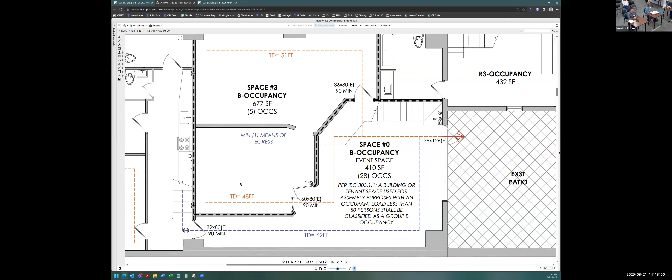This space on the second floor, the assembly space we're talking about, will have 90 people maximum. Part of the reason we're hoping to avoid having to sprinkler the studio is that it's sound separate, with isolated rooms and double walls, acoustically built so there aren't any perforations between the walls. It would be a real bummer to have to perforate the walls with sprinkler heads.

Is the R3 occupancy confusing on this plan? Is the bottom right corner an open double-story space, or is there a floor? Yes, that's where the double story space is. And the room that doesn't look like it has a door, is that the assembly space? No, that's the upper part of the recording studio. So that's also a double height space?

So the assembly space we're talking about is now to the left, space 4. Yes, that space. That's the second floor they're looking at.

Is the second floor R3 area we're seeing on our screen right now protected with a sprinkler system, since that was part of the expansion? No, that isn't currently sprinklered, but where it says R3 occupancy, where you enter into the house, the residence is all sprinklered. Yes, Matthew, that part was part of the expansion back in 2012 and 13, part of the NFPA 13R sprinkler system.

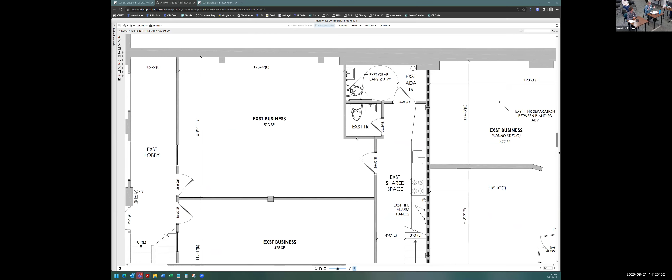If you're going to spend the money to bring in a 13 system and you're mixing and matching... Wayne, I can barely hear you. When you're going to spend the money to bring a 13 system into the building, that's your expense. Installing the sprinklers is relatively easier to do, but it's going to cost a lot of money to bring in a 13 system. But your concern is not the cost, it's the intrusion.

On your recording studio space. And it's soundproof? Yeah, agreed, yeah.

And as far as we can tell, the cost would be quite a bit higher because of... our goal would be to... Did you get any prices for that? Yeah, we've talked to some sprinkler guys. I mean, honestly...

If we could just sprinkler the second floor event space, and then sprinkler the spaces below, and those two egresses, the two stairways, that would keep it all on that side of the building, and it would be much more cost effective. The reason it would be more cost effective is because of the size of the line that has service.

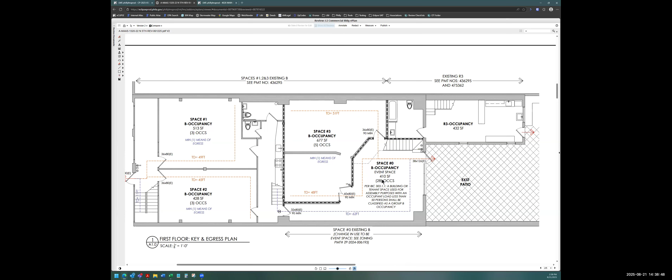I was just pointing out that the appellant's request to focus on sprinklering spaces 1 and 2, and the area above in space 4, would not address the concern I'm raising with occupants egressing through space 0. At the beginning of the discussion, I asked how occupants from the second floor egress. One egress is to the left, one is to the right. The one on the right has to traverse space 0. If that space isn't protected with sprinklers, occupants on the second floor would have to go down a story, enter a room, realize that room was actually where the fire started, and have to go backwards and back up a set of stairs. That's typically not the intent of the code. You want the entire path protected, just as the room they left was.

Could a solution be that if space 0, which you're referring to as where people are egressing, was sprinklered as well, would that address it?

So I think where we are then is the Randolph Street side plus through space 0, and not Ben's recording studio. Is that good? Yeah, and the one thing, just to be sure—obviously we've got to do the calculations—is what triggers the need to go from a 2-inch service to... or you have an inch and a half coming out, I don't know what you have coming in.

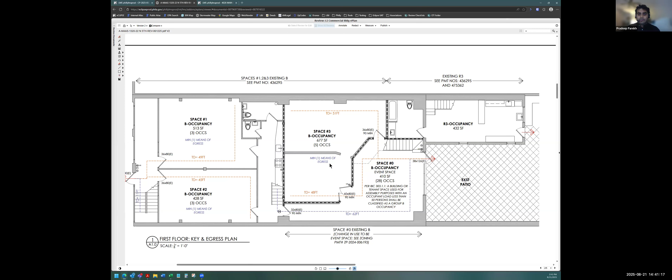Okay, so we're only looking at the ground floor on our screen, so we can't see the rest of the building at the moment, but on the—thanks.

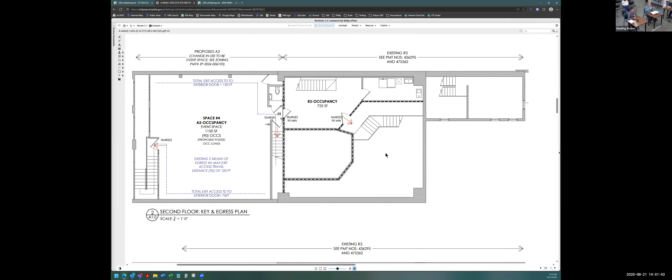Oh, I see. Yeah, it's already sprinklered in the upper part of 3, the house space, so. Yeah, the only space then that wouldn't be sprinklered in this scenario would be the studio—Ben's recording studio—and the original Trinity. Got it.

We could do that, I mean, if you guys are okay with that.

Yeah, enclose the studio. Pradeep, you want a caucus? Yeah, sure. Okay, all right, fine. Do you want us to leave? No, we'll leave, we're just going to the next one. Okay, all right.

Can you bring that... no? Okay, all right. Matt, should we have a share on Matt? See it on your screen, it's not the big screen. Okay, all right, Matt, let's see the drawings. All right, pal, let's go. Please, we're having Wi-Fi connectivity issues over here, so. Okay, that's your only connection to the outside world. Yeah, we're held hostage in here. Okay, can you see it? Okay, we got it, way to go.

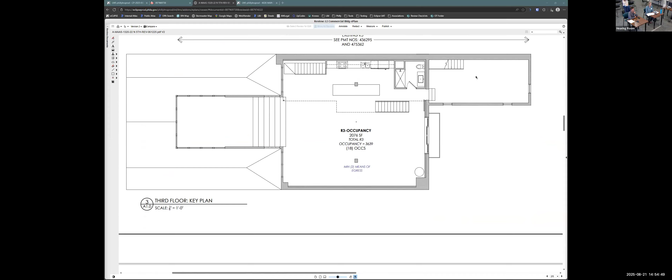Okay, here's what we came up with. Everything except the recording studio and the Trinity—everything else outside of that has to be sprinklered. The one side of the wall, whether it's the Randolph Street side or whatever side it is, has to have sprinklers or a curtain around the studio on that side. And on the other side, where the windows are an issue, they have to have the sprinkler system in there too. Every place except those two spots has a sprinkler system. So everything except the recording studio and the Trinity—is that right, Pradeep, where my purple is, all of that?

Yeah, so the recording studio is surrounded by 1-hour rated construction. In lieu of 2-hour rated construction, we would be requesting closely spaced sprinklers, and that would allow you to omit sprinklers from within the recording studio. And the Trinity is already protected with an NFPA 13R system per your appeal, so that can remain as is.

Well, no, the Trinity does not have a 13R, just the expansion to the Trinity. We weren't required to sprinkler that Trinity in 2012. I just want to make sure that's on the record. Okay, so yeah, the R3 occupancy can remain as previously approved. Right, thank you.

And the thing is, when you have your sprinkler contractor do his hydraulic calculations, I don't know what your feed is, and I don't know if it's going to increase your feed. If it does, then you gotta do that. You know what I mean?

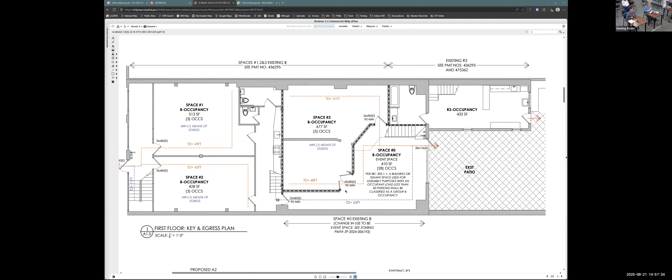And every board member agrees. I'm in agreement. We can- Pradeep, do you agree? I agree. Amy? I agree. Ted? I agree. Okay, all right guys, next case.

Okey-dokey, where we at here? Amy's back. I'll send them to board and I'll send them to you. Yeah, but I can't because I don't have his pictures. Get over here. There you go, bye-bye. Okay, all right, no problem, we're good, we only have 2 more.

Yes, next case, number 13, 416 through 24 Vine Street. Who's here from 416-24 Vine Street?

Where's Alan at? Oh, hi, right here, Alan. Is anybody else going to be testifying today? Yes, I have William Barber. I also have Boris Gurman. And then it looks like the owner of the corporate entity, Vine Street LLC, Robert Volpe, is in the back as well.

Let's start out with the 3 guys that are not lawyers. William, could you please raise your right hand and swear to tell the truth, nothing but the truth? I do. Okay, next person, could you state your name? Robert Volpe. Okay, Robert, could you raise your right hand and swear to tell the truth, nothing but the truth?

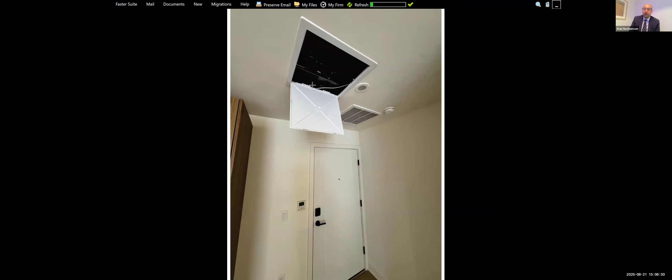So, I think there's one more. Oh, no. All right, well, those are the pictures. We also have—I want to stop sharing my screen because I think it's easier when everyone sees each other.

There's also a budget that we'll show you during the testimony of Mr. Barber. So can I present Mr. Barber now? Sure. All right, thank you.

Mr. Barber, can you describe your relationship with the property at issue? Sure, I'm Director of Construction for Lilly Development. And when was the HVAC system installed in the building? First got installed in September of 2024. Do you know when the work was completed? July of 2025 was our last installation of an HVAC unit.

And just to confirm, the opening for the access panel is 18 inches by 18 inches, is that correct? Correct. And are those panels sufficient to service and maintain the HVAC units themselves? Yes, they are. Can you explain how you position the access panels compared to the units so you can reasonably service them?

Every access panel is located where all the mechanical and electrical components are for those units. So when you open the access panel, as shown in those pictures, you have direct access if one of the boards needs to be replaced. You have access right to where the condensate line is, and then the line set as well that connects to the unit.